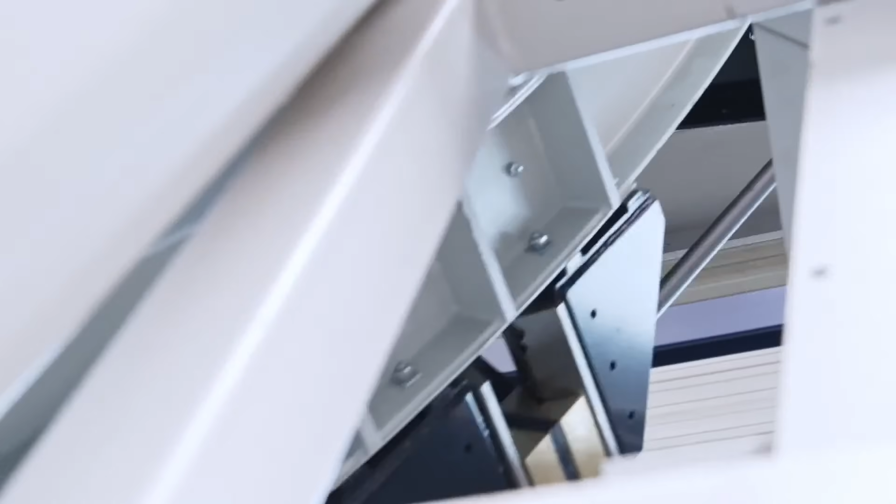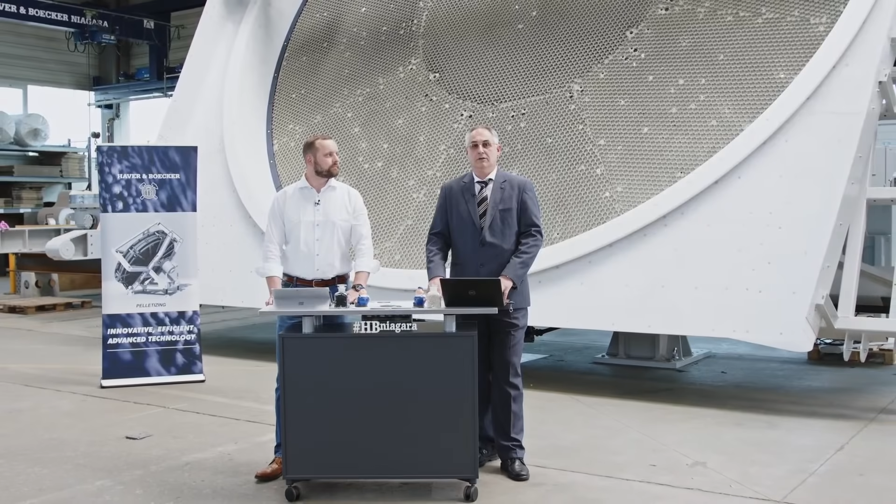Hello, my name is Metodi Slatev and I am General Manager of Haver Engineering in Freiberg. Haver Engineering is an associated institute to the Mining University Bergakademie Freiberg. This is the more than 250 years old university specialized in mineral processing and the mining industry. We are specialists for processing, crushing, screening, pelletizing, and we supply engineering for these industries.

At the same time, I am head of sales and process department at Haver Niagara in Münster. This is a plant and machinery production company which supplies the equipment for the above-named industries. In this case, we have the best connection, with Haver Engineering in Freiberg developing the process, and Haver Niagara supplying the equipment for this process.

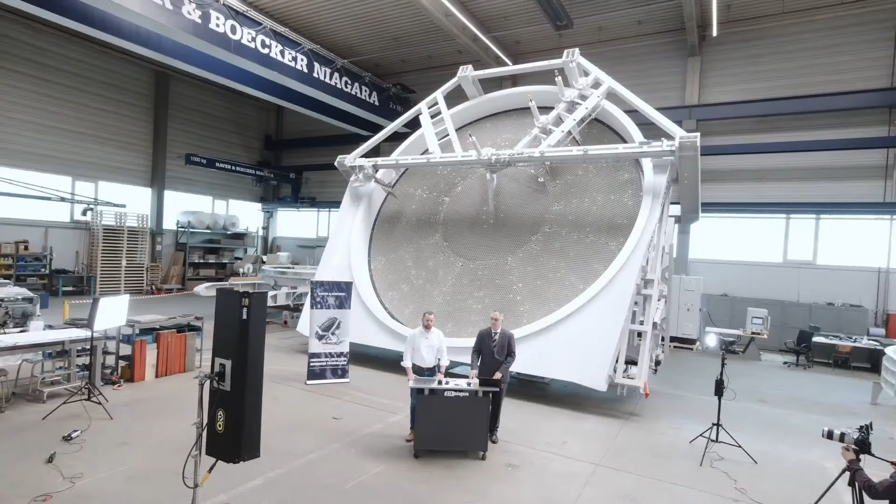Thank you, Metodi. I am Jan Lamke, Head of Sales at Haver Engineering in Freiberg and Technology Unit Manager in Pelletizing. Together, we'd like to send you a warm welcome to our presentation of the newest generation of the Scarabaeus. Behind us, you see the Scarabaeus SC 7500 with a diameter of 7.5 meters. Today, we're going to show you some insights: how the disc is working, what the disc is used for, and especially what is the benefit for our clients in using this technology.

What is a pelletizing disc? What is a pelletizing disc used for? Let's discuss agglomeration itself. Agglomeration, to be really theoretical, is the transfer from fine particles into larger balls. Balls like this, for example. In the end, these balls show tailor-made product properties. Let's discuss some of them. For example, the improved storage and transport properties. This is important for globally connected seaborne transport of iron ores, of fertilizers, even of building materials.

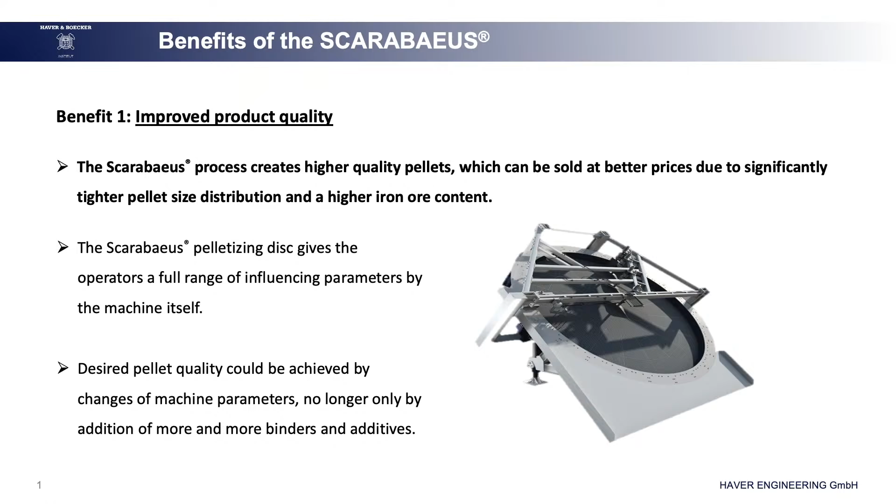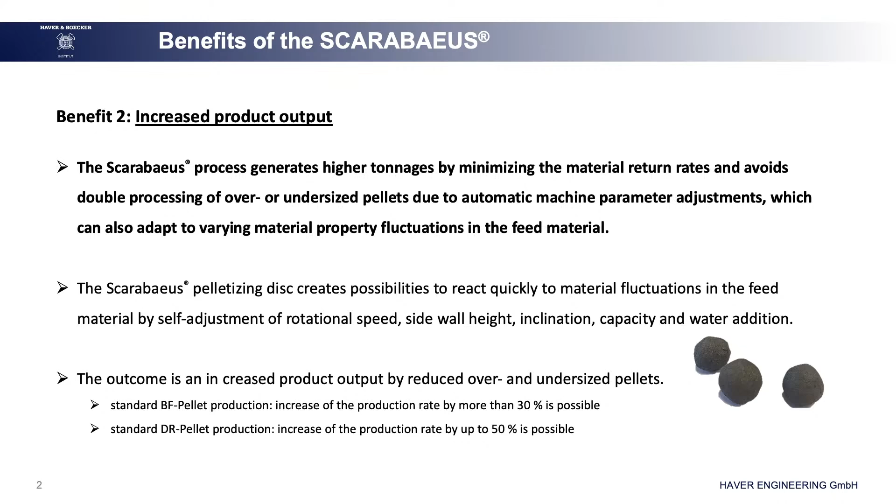Defined particle size and particle shape is necessary for the feed of a blast furnace as well as of the direct reduction, important for green steel, which we'd like to discuss later on as well. The production of a really tight particle size distribution of the balls leads to improved flowability in the metallurgical behavior of a blast furnace and a direct reduction. With the improved flowability, the capacity of the metallurgical devices can be improved.

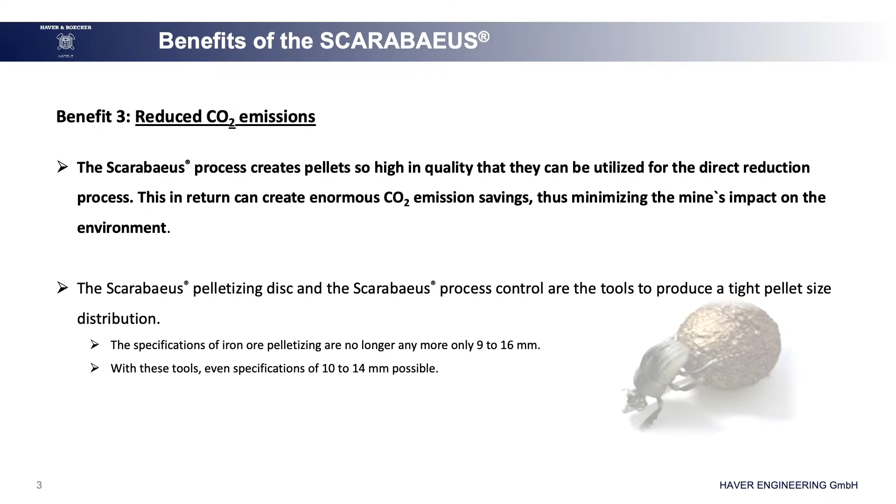The adjustment of porosity and density is important for fertilizers, as well as the avoidance of segregation. In the end, and this is the most important fact for our clients, the products show an increased market value. But today we're going to talk about iron ores, especially with the use in green steel.

Thank you, Jan. The iron ore content in worldwide mineral resources is going to be lower and lower. Even more, this industry has to supply a product, iron ore, with a constant and very often a high quality. How could we reach this goal? Beginning with the mines. We are specialists and we have know-how from blasting, crushing, screening, flotation and pelletizing. Today, as Dr. Jan Lamke already said, we have to speak about pelletizing.

Pelletizing is the process at the end of the mineral processing of iron ore. After pelletizing, the metallurgical process starts. So, at this stage, we have to have a product with the maximum quality, maximum iron ore content, so that the different metallurgical processes can be started. For example, the green direct reduction process with reduced CO2 emissions.

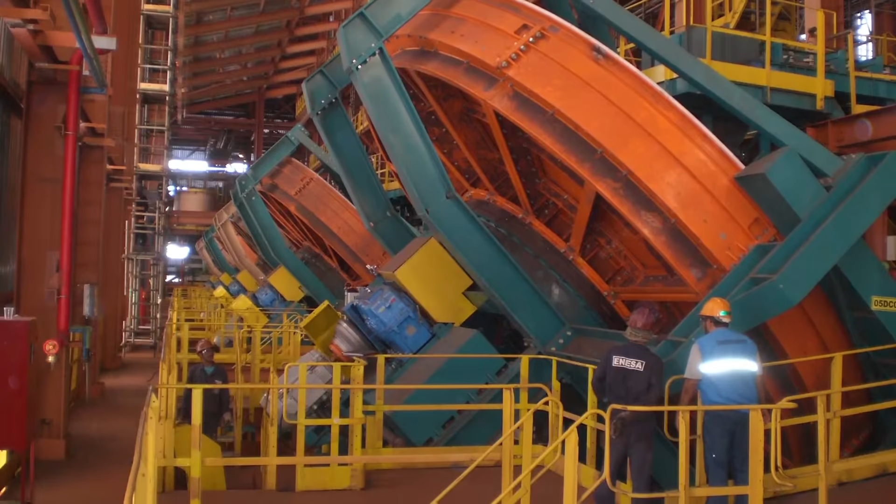As we are in the workshop of Haver Niagara here in Münster, the pelletizing disc behind us is only a standalone equipment. For sure, at our clients, there's not only one pelletizer. Typical iron ore pelletizing plants consist of 10, even 20 pelletizing discs in a line. What are the reasons for this?

Let's get into metallurgy. For the reduction of iron ores, there are a lot of metallurgical quality requirements regarding the material itself, the swelling index, the reducibility; in particular the type and the quantity of the accompanying materials is important. Therefore, it is not even possible to use natural ores. A beneficiation of these ores is necessary, and I would like to talk with you about these beneficiation steps.

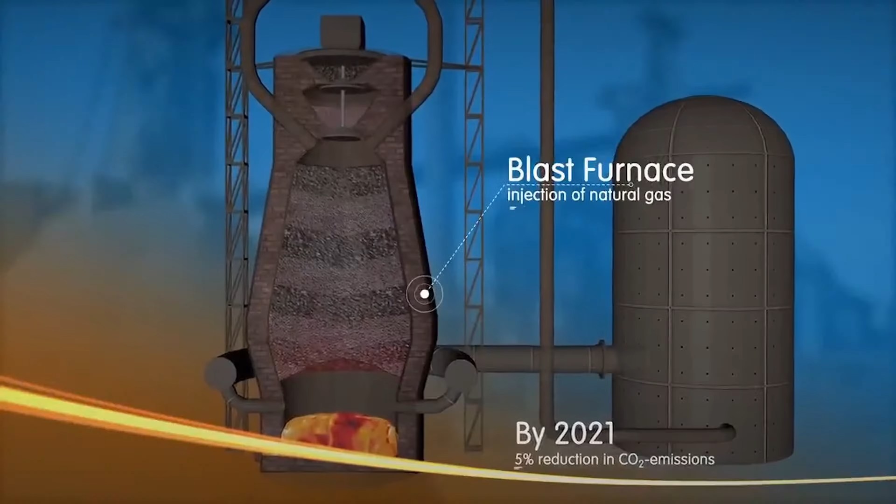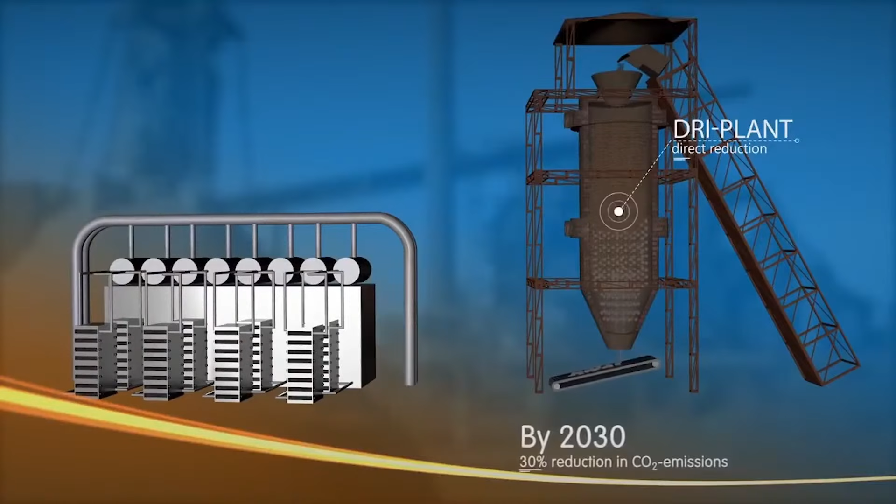Today, pig iron produced in a blast furnace is processed into crude steel in a converter. From 2026 on, direct reduced iron, DRI, will be produced in new DRI plants. The industrial DRI plant in Bremen operates with natural gas. Later, it switches to hydrogen produced via electrolysis. DRI from Bremen is transported to Eisenhüttenstadt by rail.

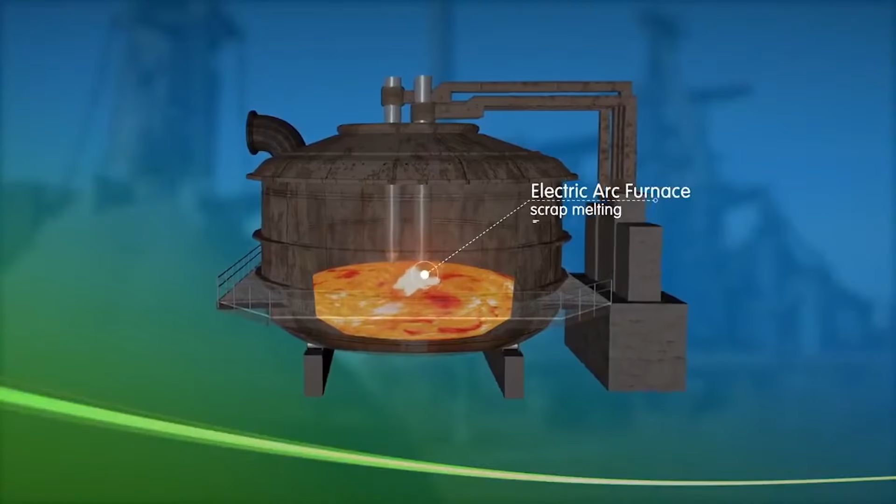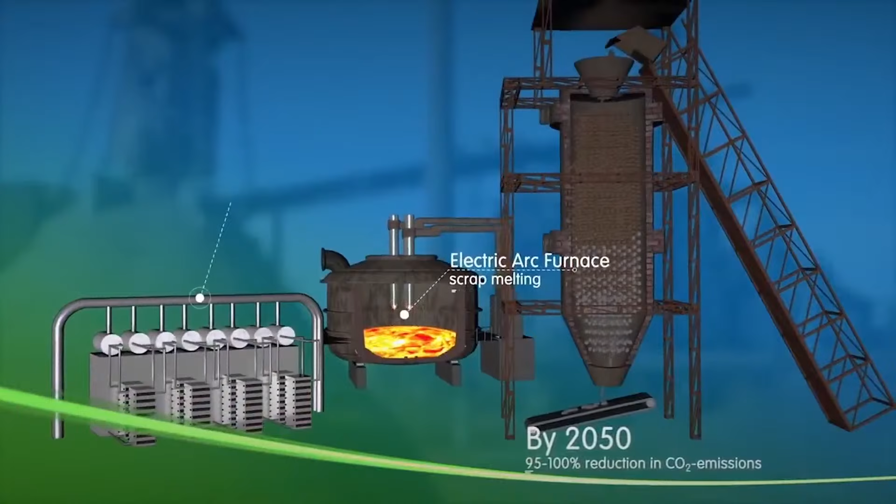There, DRI is produced as well in an innovative DRI system using hydrogen obtained from natural gas via a methane pyrolysis process. As part of the project, 2 blast furnaces are shut down at the sites. With added steel scrap, the DRI is processed into steel in new electric arc furnaces. Once direct reduction is carried out with green hydrogen, the steelmaking process is CO2 neutral. As I already told you, today we are happy to show you another pelletizing disc for iron ores.

Important for direct reduction is the production of a really tight particle size distribution of the iron ores. In the past, 9 to 16, even 9 to 19 millimeters in diameter of the iron ore pellets was sufficient. Today and tomorrow, there will be the need to produce a tighter particle size distribution, 10 to 14 millimeters, for

example. And this is only possible with a unique technology which gives the client possibilities to react to changes of the natural material itself, changes of the surrounding conditions, and in the end as well changes of the aim of pelletizing. To meet the requirements on the DR pellet, we created this lovely equipment behind us.

Yes, but this is not the beginning. The beginning was 40 years ago. For 40 years, Haver & Boecker Niagara has supplied pelletizing discs for the conventional iron ore process. For more than 12 years, we have been working on investigating this pelletizing disc, which is able to produce pellets for direct reduction of iron ore.

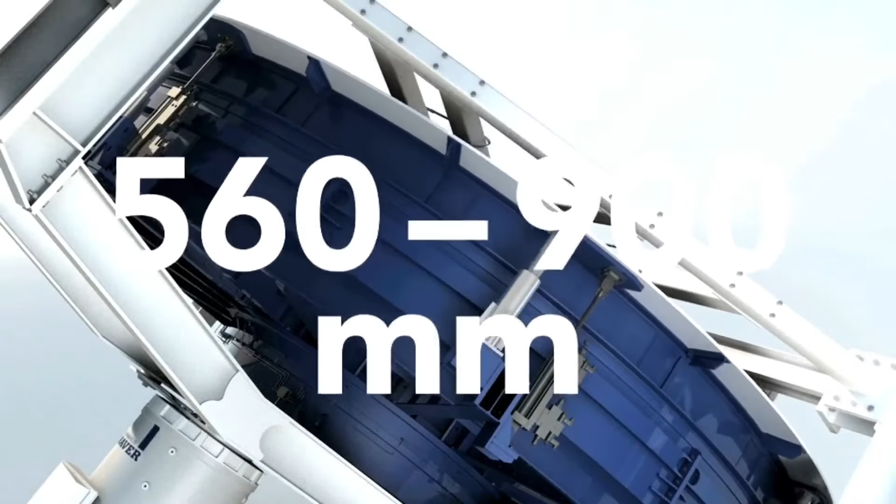There are different features beyond the pelletizing discs produced for 40 years. In addition to parameters like inclination and rotations per minute, we have the additional possibility to increase or reduce the height of the pan side wall. These features give us additional possibility to meet the hard requirements for the direct reduction pellets.

I guess you are interested in the influencing parameters themselves. I suggest we start the disc to see how the influencing parameters, speed, inclination, and rim height, are able to be changed. And what is really important, they are not only able to change, they are able to change on the fly. That means there's no need to stop the production for fine-tuning of the process. During production, it is possible to create the best pellets ever.

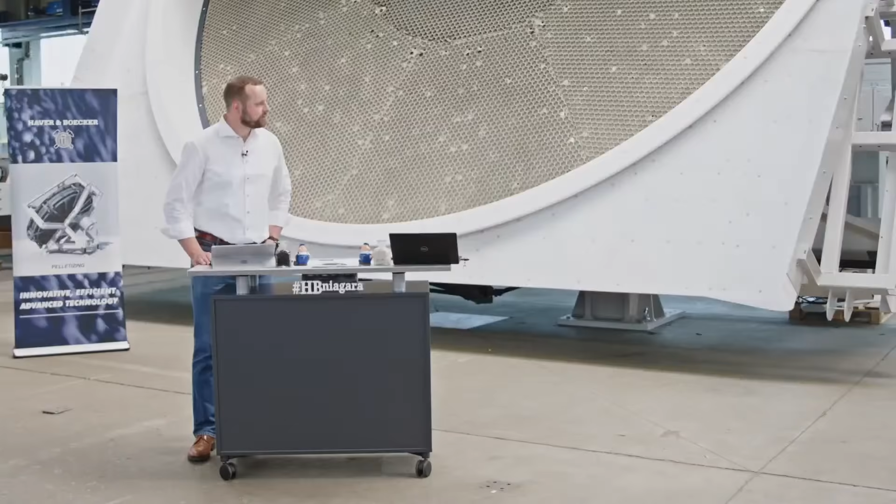Dr. Zlatev, please start the disc. Okay.

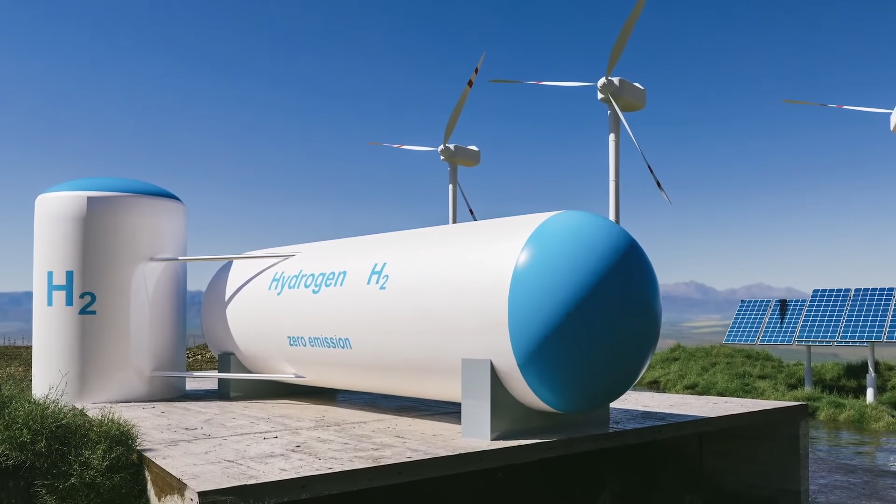What is green steel? What does it mean? How does green steel belong to our daily life? Discuss the background with me. Since the United Nations Framework Convention on Climate Change, negotiated and signed in 1992, climate protection has been accorded increasing international importance. In particular, the focus has been on energy-intensive industries as emitters of greenhouse gases.

Beside emissions trading, mainly technology changes and improvements lead to success. Europe has the unique opportunity to lead the transformation of its economy to a future which is CO2 neutral, environmentally responsible, circular, and able to compete internationally, addressing third country trade distortions and inhibitions. However, unilateral and asymmetrical regulations in the European Union and in Germany pose the risk of relocating production and emissions.

Steel is central for the European Union economically, and it underpins the development of major manufacturing sectors right along the value chain. The steel industry sustains 2.6 million direct and indirect jobs in the European Union. Therefore, there exists a clear action plan to establish a market for green steel in the period between 2021 and 2030.

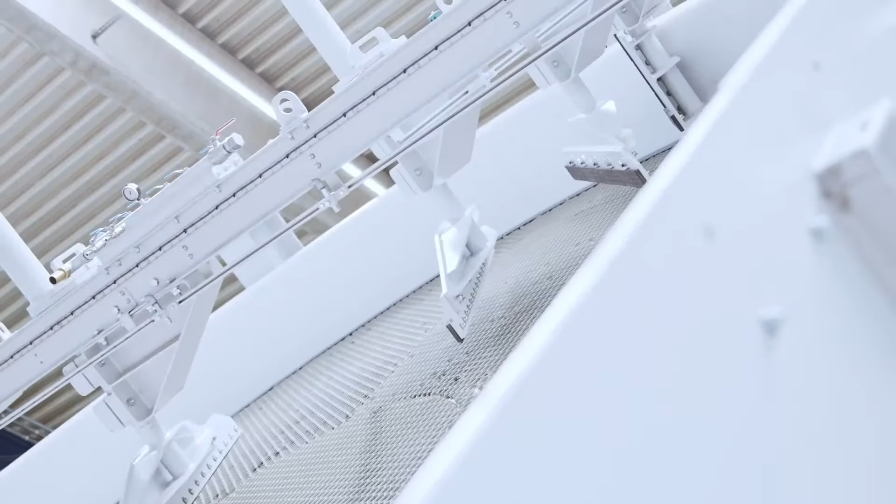Let's discuss the benefits of the Scarabaeus. In plain language, improved product quality. The Scarabaeus process creates higher quality pellets which can be sold at better prices due to significantly tighter pellet size distribution and higher iron ore content.

The Scarabaeus pelletizing disc gives the operator a full range of influencing parameters by the machine itself. In the end, there's no need to add more and more binder and additives only to create better pellets with higher strengths. The equipment can do the job.

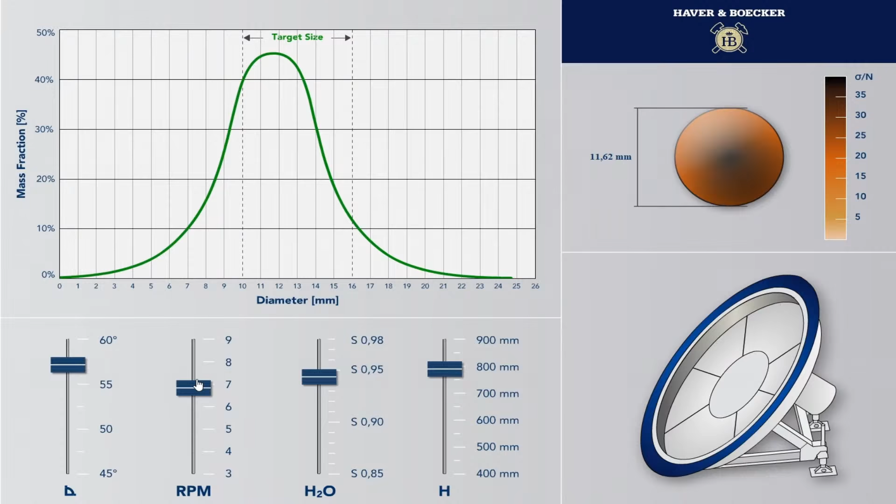Let's get on the disc and discuss the influences of the parameters: rotational speed, inclination, rim height, beside other influencing parameters like the position of the scrapers, like the inclination of the scrapers. Come with me, please.

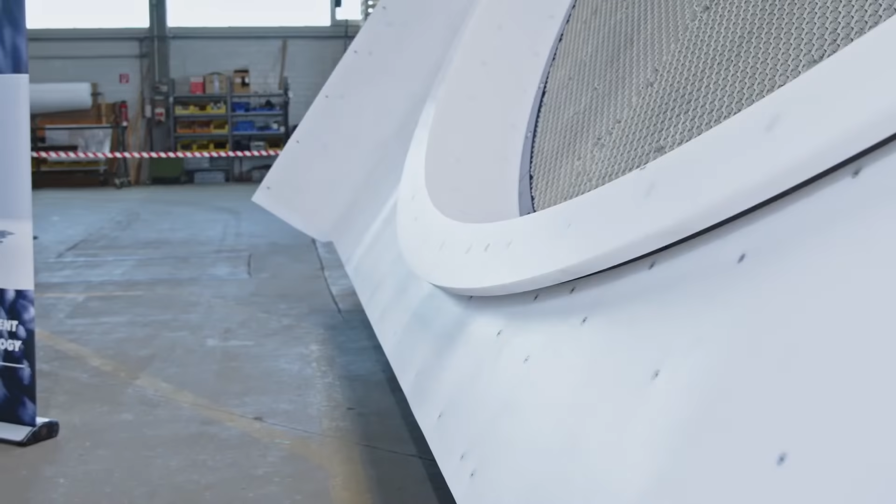Next to the pelletizer, I would like to discuss several influencing parameters with you. But before, we have to keep in mind: 150 tons per hour of material flow over that rim. 150 tons of material, iron-bearing fine particles, get into the process chamber, get wet by the addition of water, and in the end, due to the rolling effect of the pelletizing disc, the material grows until it goes over the rim, we can say. And in the end, the balls roll over the rim of the disc onto the discharge tube.

There's binder in the material, there's water in the material. That leads to the fact that we create sticky material. In the process chamber itself, while pelletizing, this is the benefit. On the discharge tube, that could lead to problems. So we have done everything possible to create a really smooth discharge tube in order to avoid sticking of materials on the tube.

In the process chamber, we can see the honeycombs, spread iron, which leads to the effect that materials get into the honeycombs and there is no movement of material in the bottom layer itself. So there is a natural bottom layer which leads to a natural wear protection.

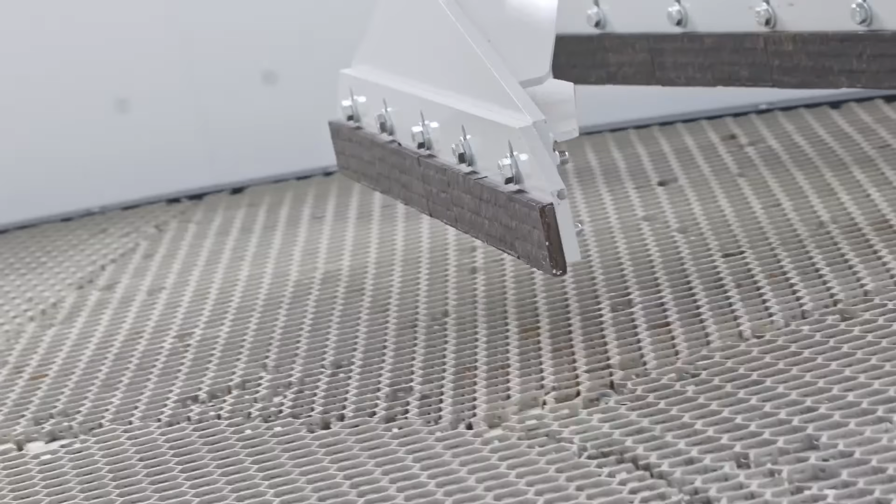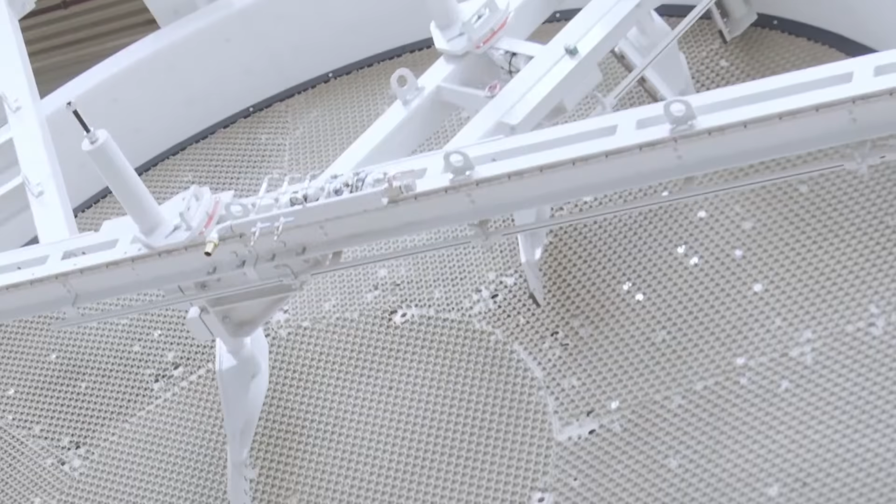As we discussed, material, binder, water inside the process chamber could stick in the process chamber as well. So there is a need to add scrapers in the process. See over there, 3 scrapers are for the bottom layer cleaning and 1 scraper is for the cleaning of the rim itself. Of course, you can see the hose where the water is added into the process chamber.

We can change the position of the nozzles, mainly done while commissioning. As well, the inclination and the position of the scrapers could be changed. That leads to improving the process, to create a really smooth process.

Sadly, I can't show you the iron ore pelletizing process right here. I would like to go over to a customer of ours, ask them what they think about it, and to see and to get a feeling about that impressive process.

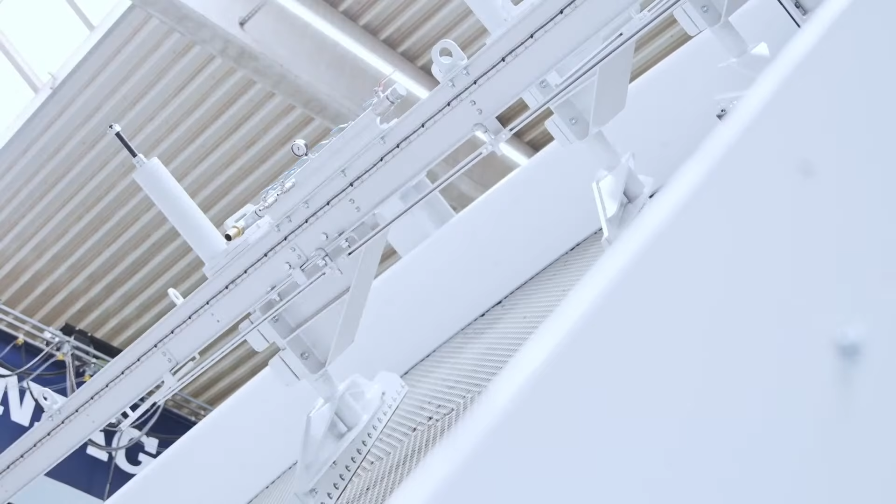Pelletizing is more than a disc itself. The knowledge of the physics leads to the perfect pellets. Thus, Haver Engineering operates a pelletizing pilot plant in Freiberg. Freiberg, the town of the Technical University Bergakademie Freiberg. In our test facilities, we are able to start the process. This was the way with our customer from Rakurs.

The first meeting was done in Freiberg, in our offices of Haver Engineering in Freiberg. We developed the best solution for the perfect pellets for direct reduction in Ukraine. The way was long, but results could be seen. In our test facilities, we have different types of machines, screening machines, pelletizing discs, and we are able to start the process to analyze and to find the best solution.